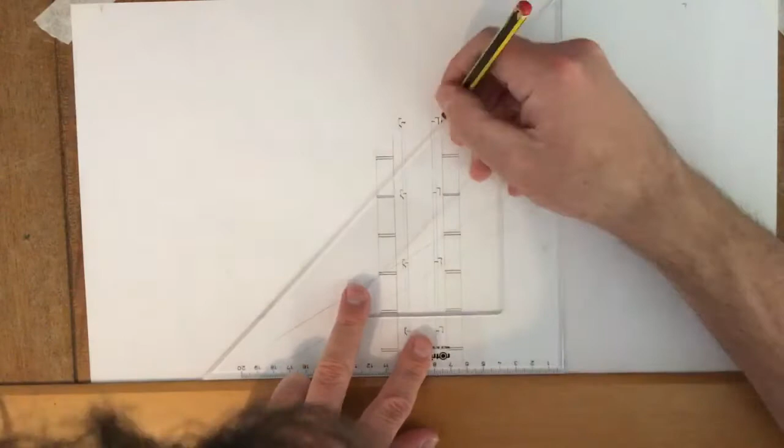Making the same on both sides. So let's just give this a little bit more detail.

So there's my flue liner. I'm going to put an extra block or two on this now that I know my height.

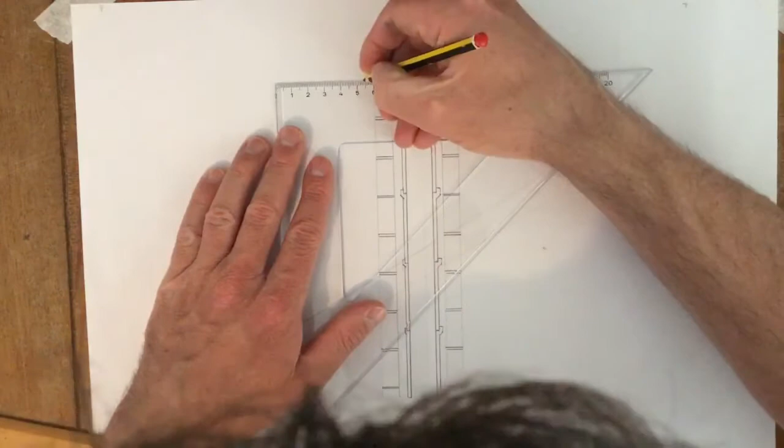They're all going to have their own height on it. Just lightly for a second first. They're going to have their own height. I'm going to give mine again another 60 mil, going into 100 at the center.

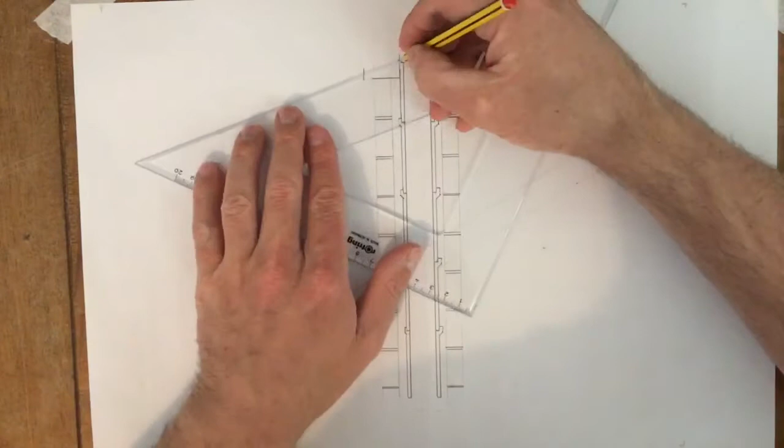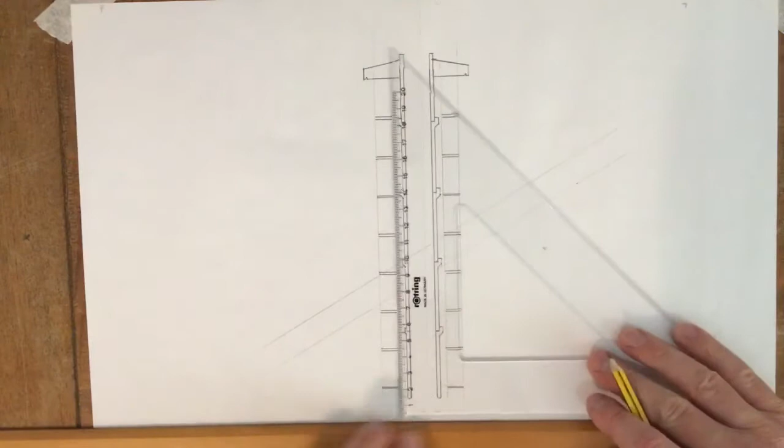Don't forget, we have a little drip here to stop our water coming down. Yeah, and your chimney caps protrude whatever way they want to protrude. So that's my blockwork kind of done. We'll add in lead and all that jazz now in a second. So, should be a bit clearer.

Now, to stop moisture penetrating from the top the whole way down, we are going to have our metal DPC tray. So, first of all, where are we going to have it? We're going to have one DPC tray here, and it goes the whole way in, and what it does basically is it catches the water from the roof coming down. And I'm going to have both of them at the same level.

So even though this one's slightly in the wall there, I'll put it in and we're going to have it coming up the inside. Now the plaster's going to plaster over that, so I don't need to worry about it too much.

The next thing I'm going to have to worry about is the rain is going to fall down here. It is going to come into a gully at this point, and then it's going to be taken forward or backwards into the drawing. So the handiest thing is to put in my gully trap.

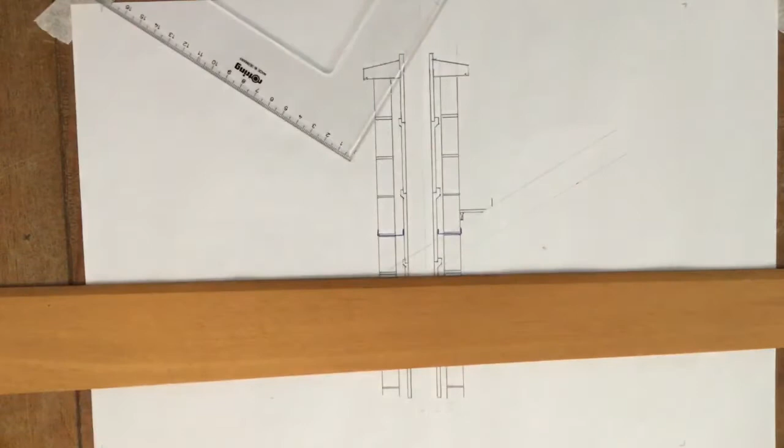We're going to have a tilting piece of timber here. So all this tilting piece is to do is to let the roof tiles that this question has just sit on top of this. Roof tiles are on battens that are 50 by 35, so I need to make sure this only goes up 35mm, which is to that point there. So this is my point at which my roofing tiles are going to sit. I'm just going to draw it in lightly for the moment.

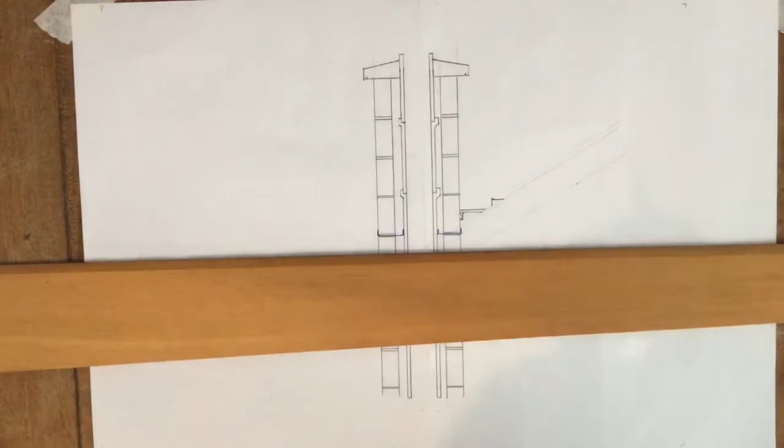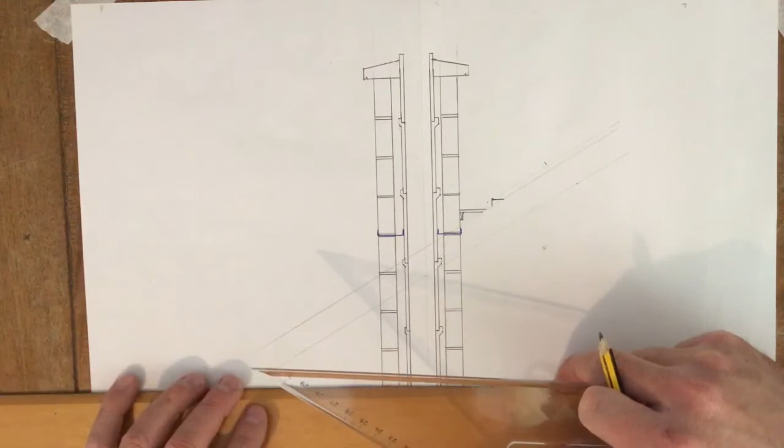So this question has tiles on it. The tiles are 420 tiles, 420mm. I want this tile to be coming down. I want the tile to be ending around right here. So going back 420. Point will give me my end point of my tile. Yeah, so that's my end point of my tile.

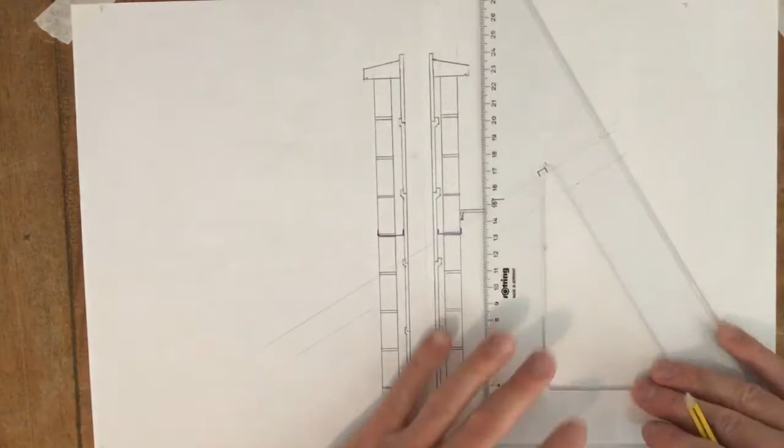So it's going to be catching in around my timber batten, which is 50 by 35, like I've already said. So there's my 50mm. So let's draw my batten first. And I'm only going to do 2 battens realistically, so if I can do one more. So them battens are spaced the exact same width as your tile that's going to be sitting on top of it.

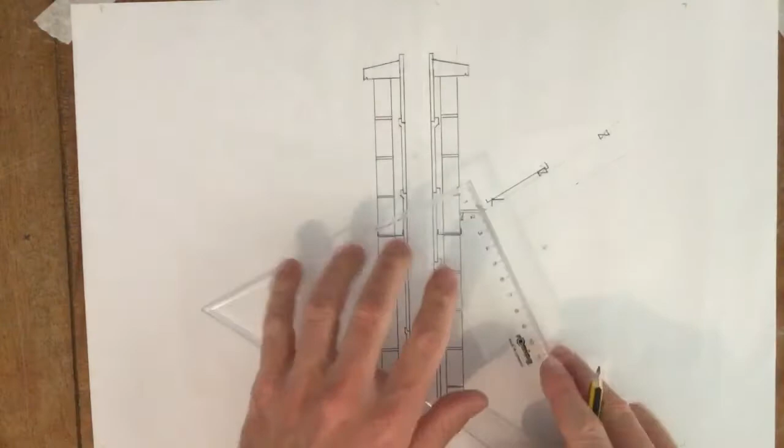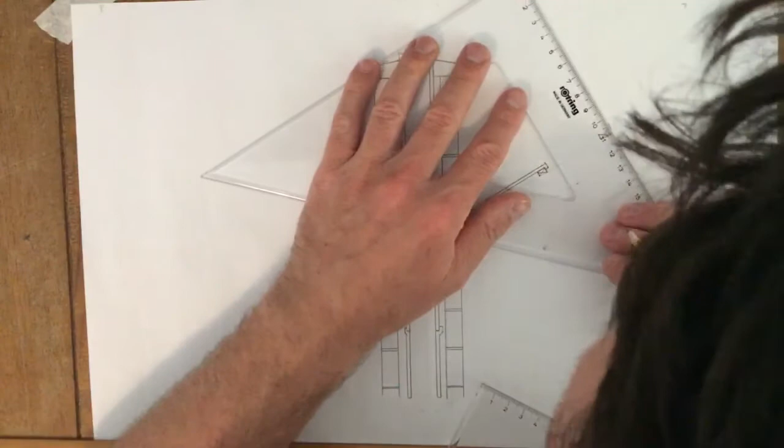Your tile is going to come down here 2mm, up there 2mm, and up here 2mm. So, I've already just measured where my start point is. Tiles are 420 by 20. Yeah. And my tiles, they're going to overlap, so the end of the tile is sitting here.

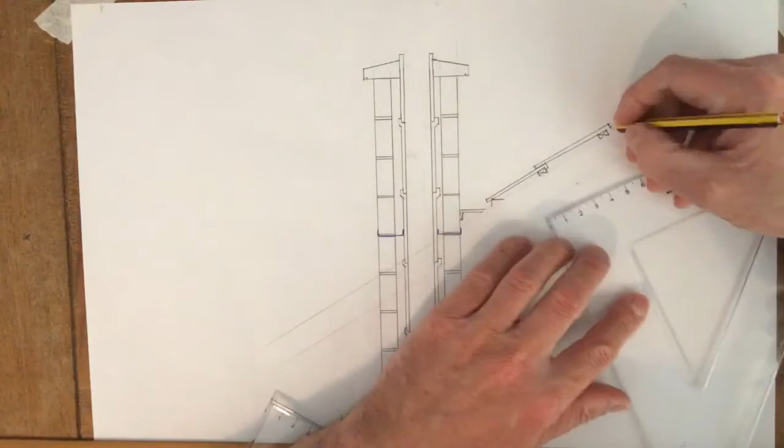And my next tile is going to sit here, and with the same angle, so I'm just going to use sliding set squares to put them back. Just so everyone knows they're going off into the distance. I'll put a break line up there later on. The other couple of little things, I am going to have an end batten here to support it. This is same size as my timber rafter, which are 150 by 50.

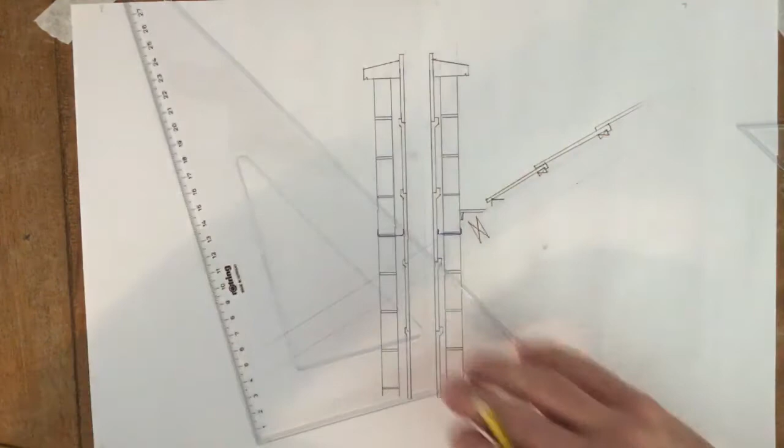So that's timber work up this side is all pretty much done. I have a bit of lead to put in here, but I'll come back and do both lead bits in a minute. Yeah, so I might as well, when I'm doing tiles, continue the tiles on. So this is my mark for my battens. I'm going to start my first batten back here just a tad. Battens 50 by 35. I'm going to do 2 down here because it's just a detail.

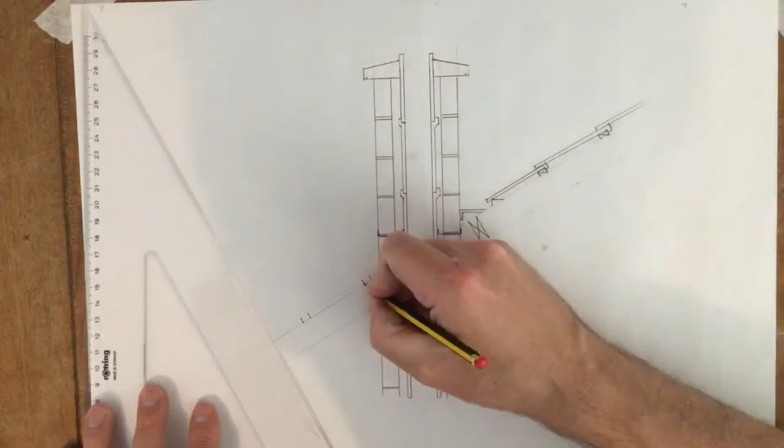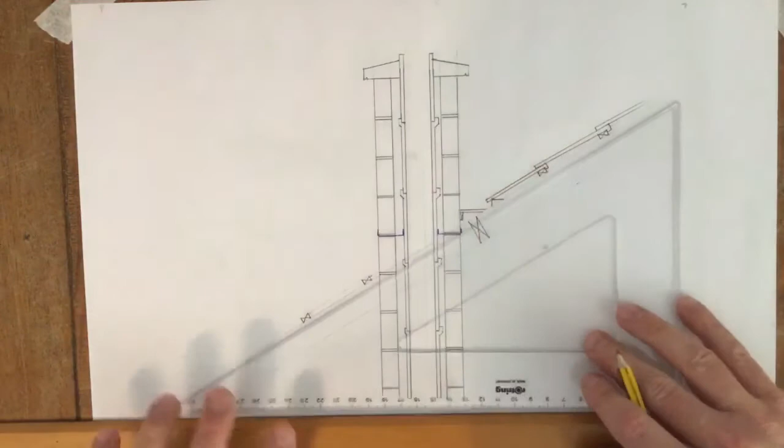And so I'm going to start at the bottom batten because you can see the tiles have to sit on each other batten the whole way along. I'm just going to be a bit lazy and take my measurements from up here. First tile this way. And so that's 2 millimeters because it says it's 420 by 20 tile.